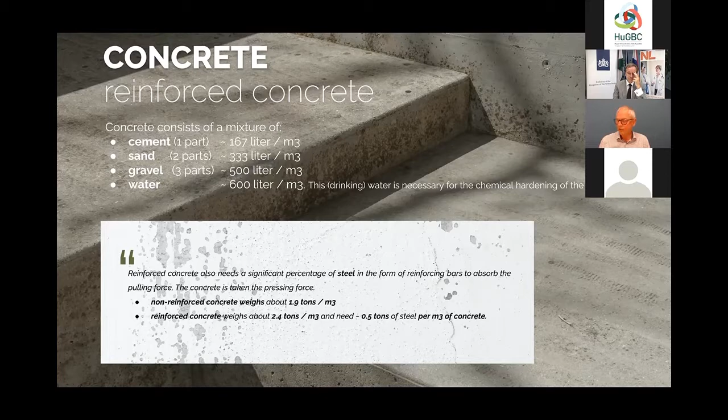The water, drinking water, is necessary for the chemical hardening of the mixture. And then we have still normal, non-reinforced concrete. Reinforced concrete has also a lot of steel in it, about 500 kilos in a cubic meter. And when I show you the next one, then you see how only the cement is produced.

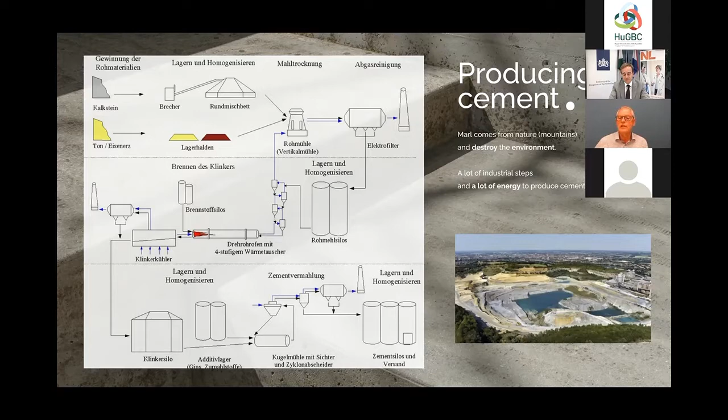You see in the scheme a very complex scheme of making cement, and well, I don't want to tell all the steps of it, it takes too much time, but you can see that there is a lot of transport, a lot of storage, there is a lot of energy necessary before it is cement, and then we have only cement, and it is only a small part of the total.

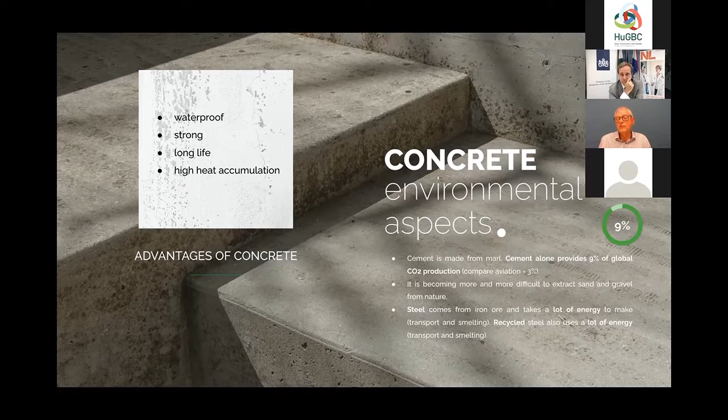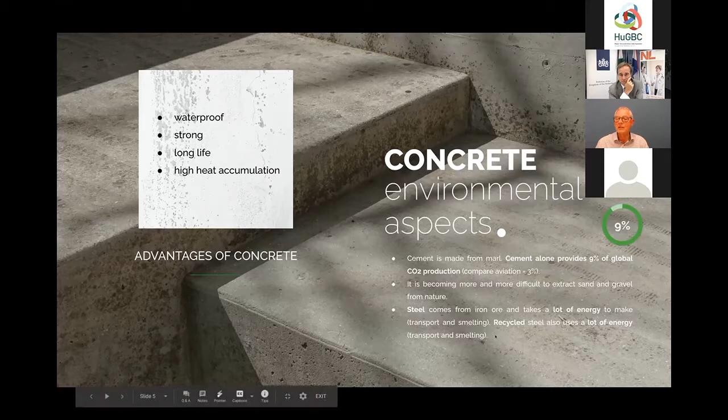And then, last but not least, a lot of steel we need in the concrete, and the steel comes from the ore, also from the earth, and it needs a lot of energy to make steel in the quality that we need. A lot of transport, a lot of melting, and recycled steel also uses a lot of energy in transport and melting. So altogether, we have disadvantages of using concrete.

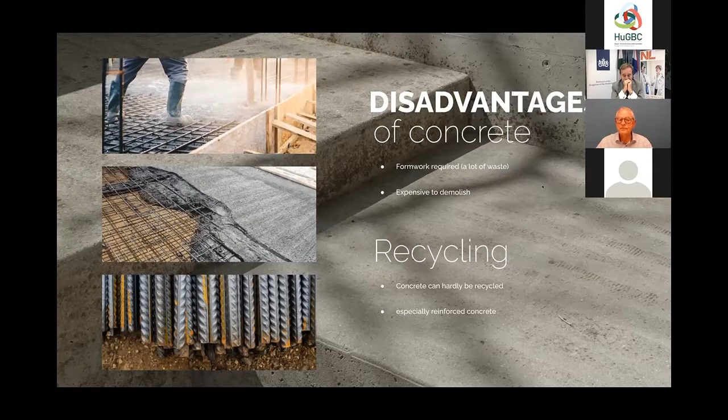As you see in the picture here upside, you need formwork from wood, and mostly it is a lot of waste. Also a disadvantage is that it is very expensive to demolish because of the steel in it. And so the recycling of concrete is actually very difficult and not very environmentally friendly, especially the reinforced concrete. Oh, I think too fast. Then wood.

Why wood? Well, wood has one very positive point, in my point of view: if trees are growing, they absorb the CO2, and the CO2 in a chemical way is broken down into two components, the C atoms and the O atoms. The oxygen goes back to the air when growing the tree, and the C atoms are stored in the wood. And if we burn wood after the lifetime of the tree, let me say 50 years, the CO2 comes back into the atmosphere.

So exactly what we absorbed in the 50 years is coming back in maybe a few hours to the atmosphere, and that is not what we need. The same process is happening when you have big wooden areas that are not production wood and you let them rot, then also in the rotting situation the C atoms come back into the atmosphere and the CO2 circle is closed.

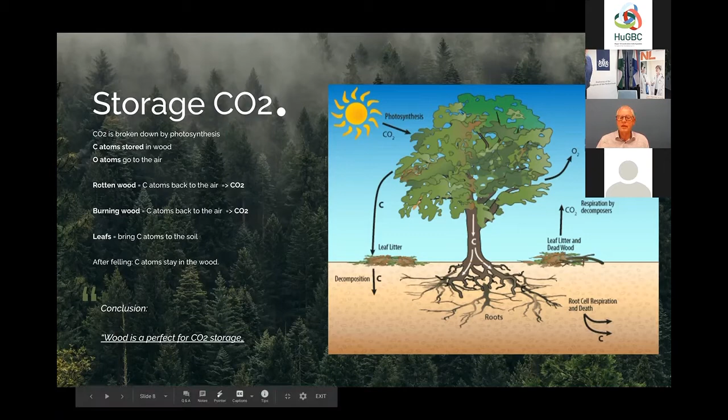When we have leaves on the ground, the C atoms go into the soil, and after felling the wood, after its lifetime, the C atoms stay in the wood, and that is a very big plus for wood. So wood is a natural product, but it contains the C atoms all the time that it stays as wood. And when it is rotting, as I told already, in a natural situation maybe in 5 years all the CO2 will come back into the atmosphere, and when it is burned, maybe in a month after felling, the C atoms come directly back into the atmosphere.

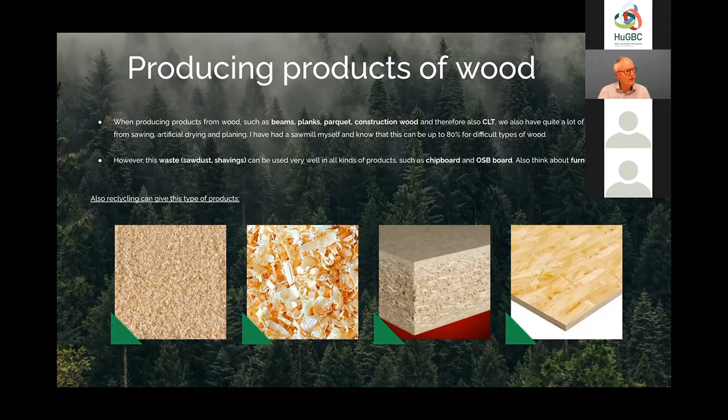But the waste, in the left 2 pictures, is very good for making all kinds of products. When you cut the wood, you have the sawdust, and the second is when you're planing the wood. You also have shavings and leftovers, and they are very well used to make all kinds of plate materials like chipboard and OSB plates. And also in that product, the CO2 stays in the material.

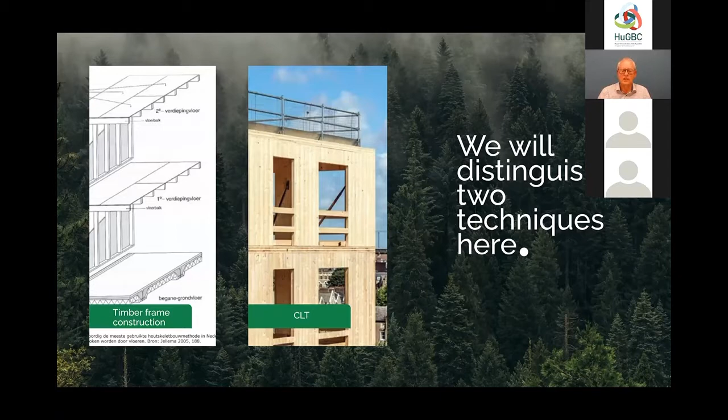What is the timber frame construction? The timber frame construction is a wooden frame made from all kinds of wooden elements, mostly placed 40 centimeters center to center. And on both sides, they have a sheet material, plasterboard or Fermacell, to complete the element. Here you see an example on the picture with an extra plate, and that is a zone for all kinds of piping material. And outside there is mostly an extra insulation layer finished with a waterproof layer, for example facade plaster. But it can also be another product.

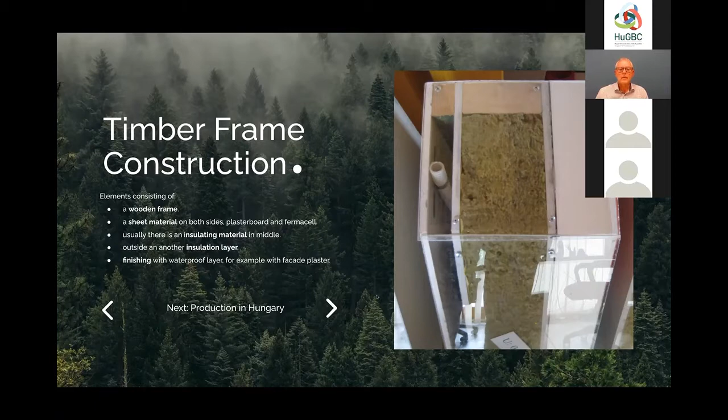There is a good factory in Hungary who makes these elements. This was made, I think, in 2011, if I remember well. An automatic factory to make these elements, and on the right picture you see that the elements are filled with an insulation material.

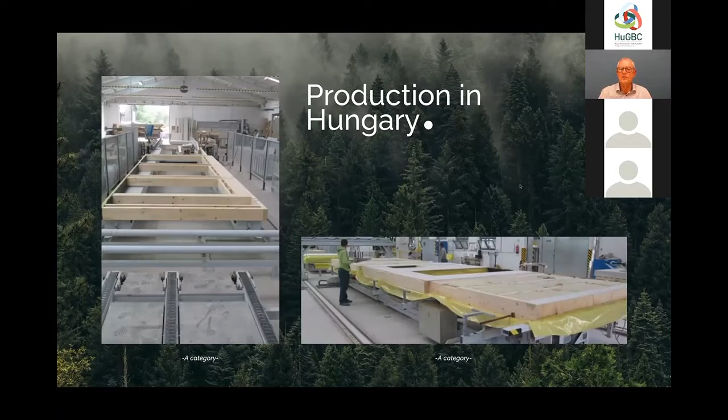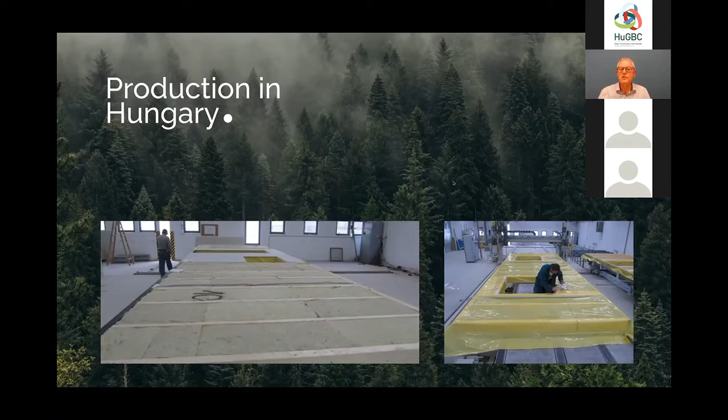Here on the left also. Then there comes some foil for the water resistance, the moisture. And then on the left side, you see that the elements are ready for transport. The windows are mounted in the factory. The plaster is already made on the outside. And this way, it goes to the site to build houses.

Oh, the aspects of timber frame construction. The good points, the advantages: it is prefabricated, it's in a factory, and that means that around the year, summer and winter, it's possible to make these elements. You have to store them, and then when the weather is suitable, you can go to the building site and place them together. There is a fast assembly time, and there is a very high heat insulation possible.

In Holland, we use the R value, 8 till 10. That is a normal value for zero energy houses. In Hungary, it is the U value. It is about 0.1.

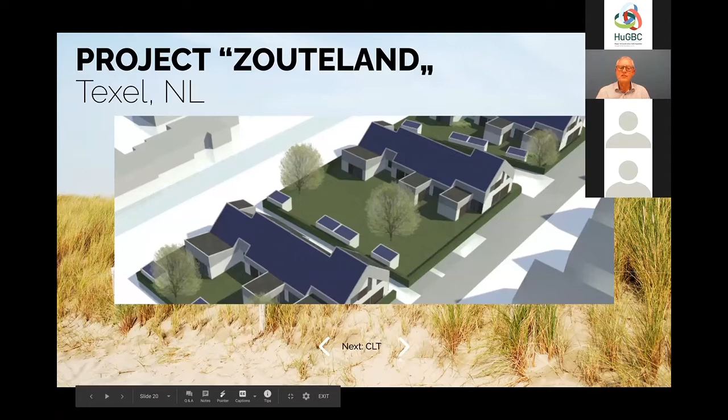This is the maquette, 3 rows of 4 houses. The PVs on the roof. Here you see one row of 4 houses. Here you see the 3 rows. And this is from the north side. On the north you see small windows because that's the kitchen side, and you need light in the rooms. But they are smaller because although the insulation of the windows is good, it is not the same quality as the wall. So reduce the square meters in the north part.

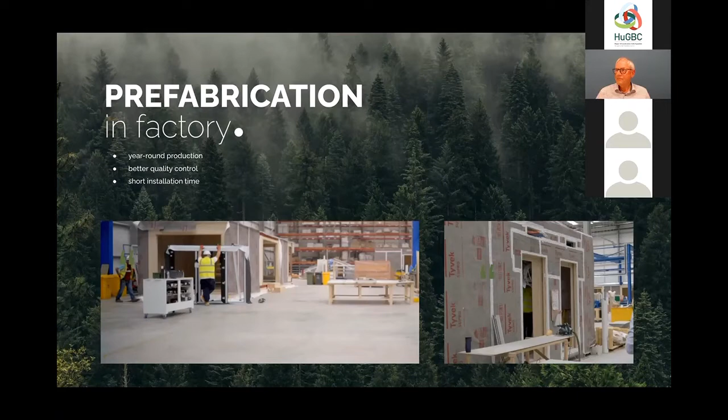I show you HoHo in Wien, several pictures about Jakarta Hotel Amsterdam, a pavilion in Eindhoven, the Dutch Design Week pavilion. What is in progress now is HAUT Amsterdam. It's now under construction. I show you a project in Rotterdam made by the architect himself, Roelof Gortemaker, and his wife. And I show you some pictures of some other projects. Let's go to the first step.

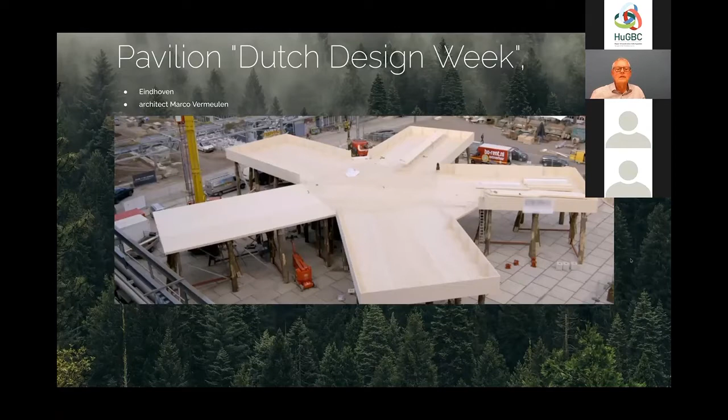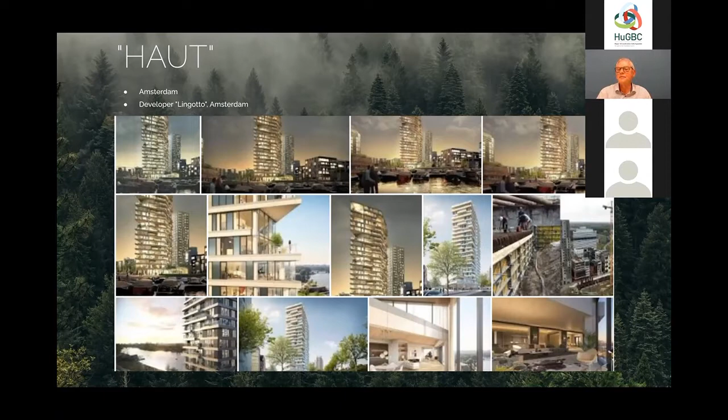Then we have in Amsterdam, just under construction, but here you see the artist impressions, Haut. This is a joke. Haut klinkt als hout. Hout is wood in Dutch, but this is the French version. Haut also means high. And here you see it under construction. The kernel in the center of this building is concrete because it will be a very high building, but 90% of the building is CLT. Floors, walls, everything.

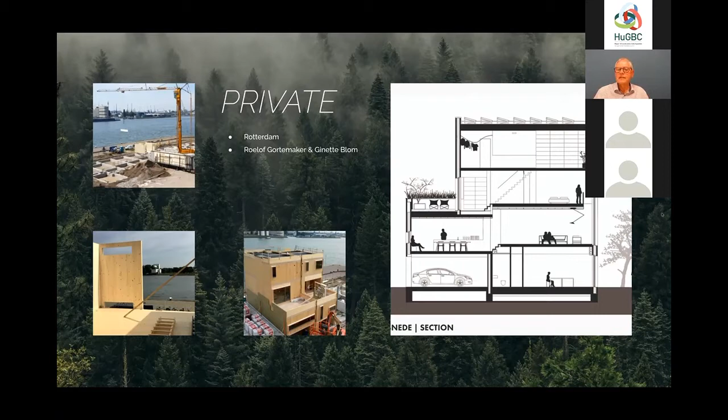Then a private project of Roelof Gortemaker and his wife Ginette Blom, architects in Rotterdam. They designed the house themselves. It is made in CLT. It was also ready under the roof, watertight in 2 weeks. So it has also great advantages.

The aspects of CLT, just like the timber frame construction, have actually the same advantages. It is prefabrication in a factory, production year-round. The quality control is perfect in a factory. It has a short installation time.

It has a better heat accumulation than the timber frame construction, I show you later. And you can make, different from the timber frame construction, high-rise buildings, as you saw. It uses, of course, more wood in relation to timber frame construction, and it is heavier in transport. That's logical because there is more wood per square meter of wall than the timber frame construction.

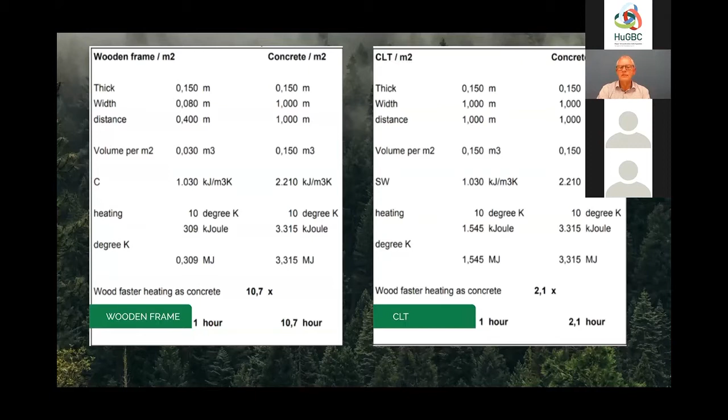Then I make a calculation about the heat accumulation of a wooden frame wall related to concrete. It is on the left side. I use here a 10 degree temperature difference, and you see that in the speed of the energy you need to warm up, a wooden frame house is about 10 times faster than a concrete wall.